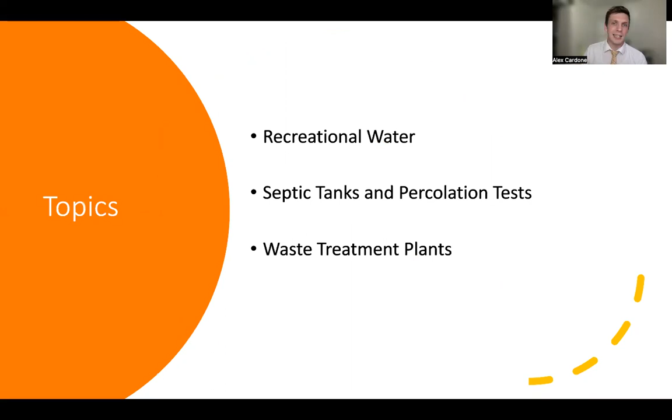So the topics that we're going to be covering very briefly: recreational water, septic tanks, and percolation tests, and wastewater treatment plants. So very quickly, we're not going to go over too much having to do with the recreational water, but one thing I really want to illustrate is that very similar to the water that we drink, just like we covered last week, recreational water should contain a very limited amount of bacteria. By that, I mean, as feasible, none, if possible.

For example, even pools that utilize chlorine, bacteria can build up, and that's a concern. Even though we're not actively drinking it or bathing in it, making sure that our recreational water is as clean as possible is also vitally important, because it's not just through ingestion that we could be subject to waterborne illness, waterborne disease, and kind of that stagnation. So just keep that in mind. It's important that we're trying to keep the overall quality of our water high, not just our drinking water.

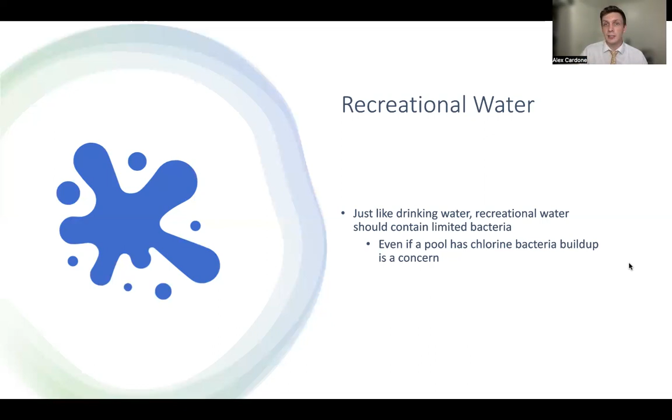But let's go ahead and get started on some of the really new material, which is percolation tests, or perc tests. Ultimately, the purpose of a perc test is to examine how rapidly water is absorbed into the soil, specifically because that water is going to ultimately run off into the regular ground and through a septic system. Typically, this is very important if you're looking to build your own house, especially if you're not going to be connecting to regular city or county water supplies or sewage supplies. A percolation test is very important to better understand what kind of soil and what kind of environment is around your house.

So, as you may come to realize, there are certain substances that are both good and bad for certain areas, specifically drainage fields where water will kind of leach into, but we'll get into that a little bit later. So water permeable substances increase the absorption rate, while less permeable substances such as clay, which is one of the most common ones that we find, decrease how well water can absorb into the rest of the soil. So understanding that can help you to know whether or not you're going to pass or fail a perc test. And it is important to understand that a perc test is very important.

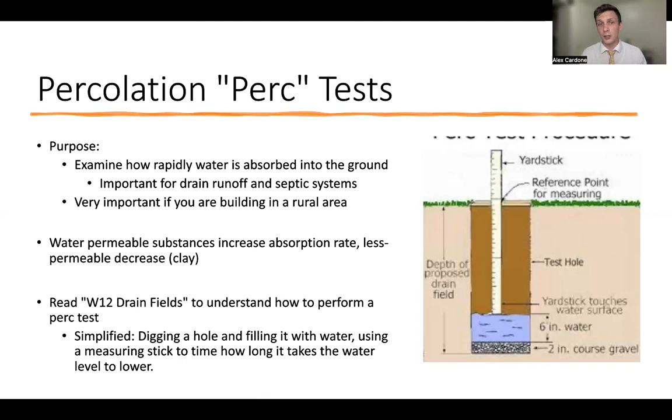So next, septic versus sewer systems. So no matter where you live, well, at least here in the United States, I'm not very familiar with how it necessarily works outside of the United States. But our wastewater, it goes somewhere. So septic and sewer systems really differentiate who owns the sewer or the wastewater treatment and where in location these things are. Typically in more rural areas, we have septic tanks, whereas in more city environments, we have sewer systems. Septic tanks, ultimately it's the owner.

It's a septic tank, that picture up there in the top right with the two green circles. That's a septic tank. And it's basically a miniature wastewater treatment center that's right in there. As well, the drainage field helps to filter out any particulates or contaminants. We'll go over how it works here in a second.

Whereas in that bottom right, you can see these houses, they're connected to pipes, which connect closer to the street into a bigger pipe, and then it's shuttled off somewhere. So sewer is transported to a central location to be treated instead of on site at the house. And typically they're treated by the city or the county. So typically you're billed by the city or the county.

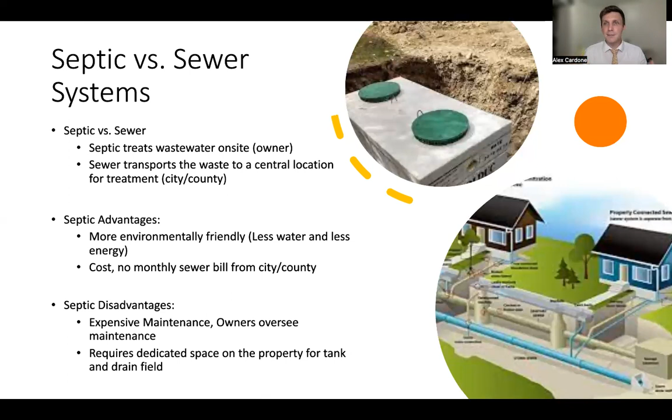But let's go over what a septic tank is. So here it's just a picture. I'll try to describe it the very best that I can. Basically, it's a big concrete box split up into two sections. There's the settling tank and then a filter section. These two compartments typically have holes at the very top so that anyone can access both of these containers. These green circles right here are just lids.

And so water flows in the inlet portion, very aptly named. That's water coming from the house. Water from the house goes in through the inlet and it immediately hits this T right here in the pipe. And that's very important. What this is causing is the water to hit it and stop. That's causing all the water to go straight down, so that any solid waste is going right down here to the bottom in sludge.

The reason for that is you'll notice these two dividers, they're not divided completely. There's a little gap in between them, known as a baffle. This is to help limit the amount of solid particulate that makes it through to the secondary area. Again, the whole purpose of this is so that the water can get through, but some of this sludge at the bottom, the heavier particulates, or scum up here at the top resting on the water, the lighter particulates, don't make it through to the other side.

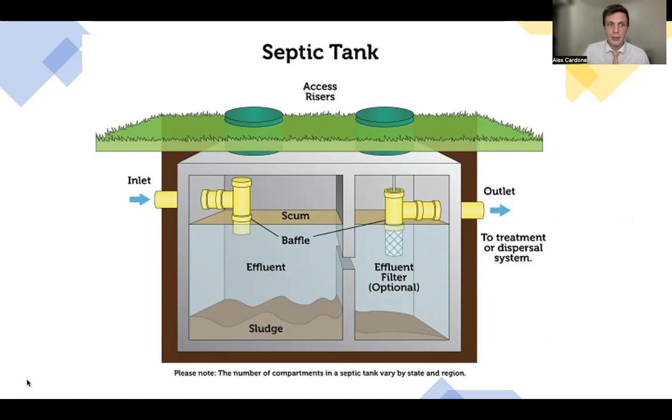Inside of this sludge, however, is an ecosystem very similar to our gut, our stomach lining and our digestive tract. There's a whole biome of bacteria that's good. And we really appreciate them because they have a very good job of eating that sludge. It takes time, but it's anaerobic bacteria that digest those solid particles. So aerobic, you can think of oxygen, like aerobic exercise, you're having to breathe a lot. Anaerobic means no oxygen. So this is bacteria that thrives in an environment that does not have a lot of oxygen. And so the container being sealed is very, very important because it helps that anaerobic bacteria flourish.

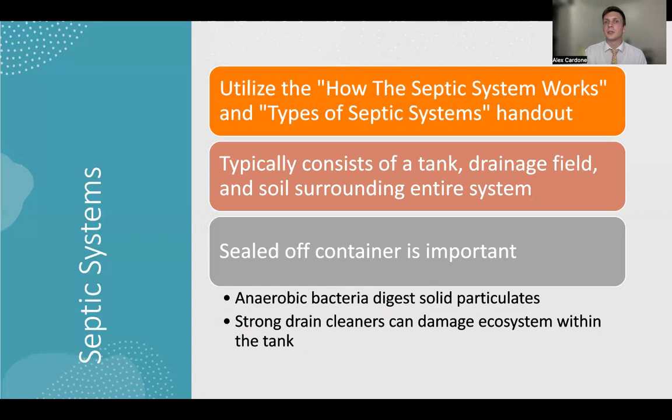It's also important to understand that they're very delicate. That's why strong drain cleaners and things of that nature are sometimes not the best. We still need to clean our houses and make sure that our systems on our end are taken care of. But too much or too harsh of chemicals can actually damage that ecosystem within that tank and lead to further buildup of that sludge. But that's a little bit about septic systems. Again, it consists of three parts: the tank, which we just went over, the drainage field, which we're going to go over right next, and the soil that's around it. And we'll describe that here in a little bit.

So, septic system drainage fields. Ultimately, it's the liquid waste, the water that went through the tank and is now being distributed out into the soil around your environment and around your house. There are a lot of different ones in the handouts that I referenced before. Really focus on three types. There are gravity systems, which utilize a septic tank and require a distribution box so that the water can flow evenly. However, it requires gravity so that the water can go down. There's no pump house using extra energy to move this water anywhere. So if your property has a natural decline, a gravity system may work out just great.

Then there's also a sand-lined trench. This uses a septic tank and a pump tank so that it can use some energy and push this water through a sand-filled tank before it gets to the drainage field. I have some pictures on the next slide to help out with this as well. The sand acts as a filter, and that'll make a lot more sense; we're going to be referencing back to how sand filters wastewater quite a bit throughout this week. The sand acts as a way of treating the waste before it even gets to the drainage fields. And then there's a mound.

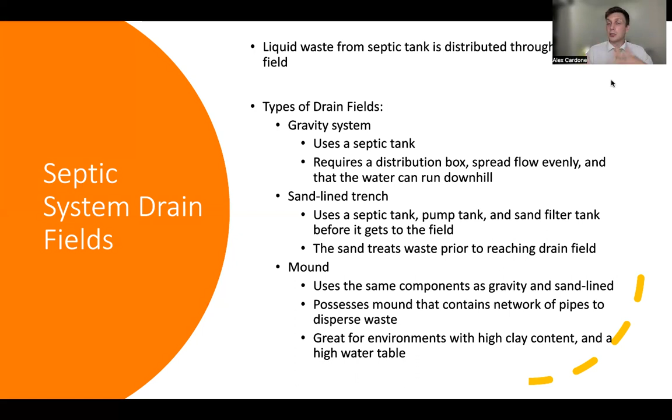And this is great for environments that have a very high clay content, because again, clay, it's not very permeable for water. However, if you have just very slow drips, it can work with that. It's just going to slow down the rate at which water goes through. And as well, if you have a very high water table, because again, we don't want water flowing too fast, because if it flows too fast, then it might not filter all the way before it gets to the regular water supply. And now let's look at some pictures to better understand this.

So up here in the top left, we have a gravity system. So we have a little house and it's working. The pipe goes straight down, and it's kind of hard to tell, but you can see from the landscape, it's kind of downhill from it. Just imagine it's going downhill a little bit steeper, I guess. But it goes from the house into a septic tank. That concrete box moves forward to another box. This is a distribution box.

So this is what splits the water into 3 or multiple different ways into these various different tubes that stretch the entirety of an underground field. And in these tubes are small little holes that are drilled in with purpose. So as the water goes through the distribution, it filters out evenly throughout the different tubes, and then the water can drip through those holes evenly at an appropriate pace so that we can time it correctly. Because at the very bottom, you can see that's groundwater. We, again, don't want water to go too fast, and we don't want it to go too slow. It's a very delicate art.

Up here at the top, this is an example of a sand-lined filter. So again, we have our house. It flows from the house into a septic tank, just like gravity, and then it goes into a pump tank. This just uses energy to push the water through something. It's going to need a little more oomph than just gravity itself. And that's because it's going through a sand filter.

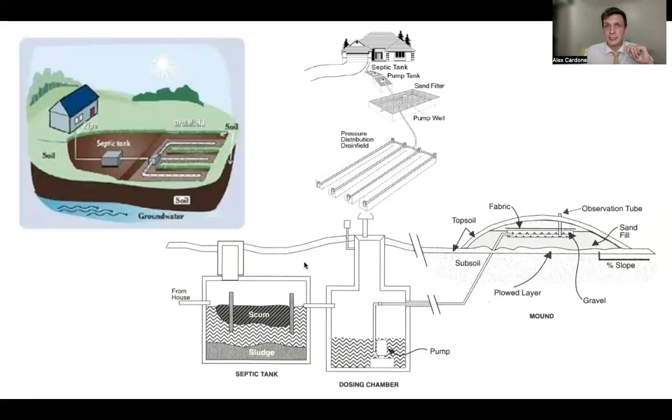So now let's go into the city sewer waste treatment centers. I guarantee you've seen these. You possibly just didn't know what you were looking at, or you knew and you're really smart. But be sure to watch. There's two videos. They're both 25 minutes long. I apologize about that. But after you look at this, after you look at your own reading, it can provide a little bit more examples of what these things are.

The biggest things I'm going to try to highlight and try to help you avoid getting dragged down into too much terminology. Some important things to remember, though, when it comes to wastewater: the average person is estimated to produce roughly 125 gallons of wastewater per day. If you remember that exercise where you tracked your own wastewater output, how much water you drank and used, you may have been close. You may have gone way above. You may have been really below. That's the wonderful thing about averages. But on average, 125 gallons of wastewater per day.

You think of some of these cities with millions of people in it. These waste treatment systems are going to have to deal with a lot. And that's why they're here, and that's why typically you have to pay a monthly fee to upkeep this. It's very important. All city wastewater is sent to a central waste treatment center, such as the one illustrated above. And these, it's important to understand, are an alternative to a septic tank.

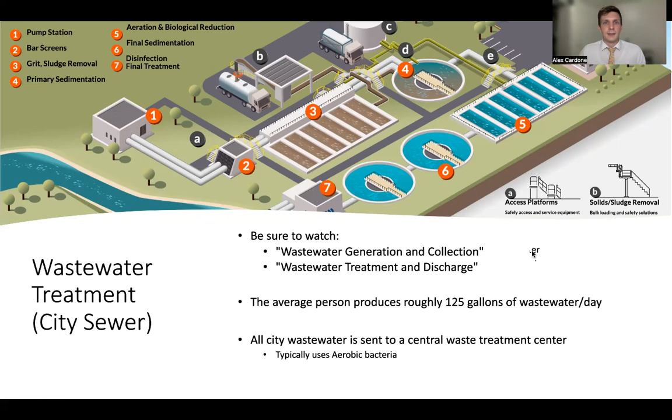All right, I think it's thinking.

Okay, good. So it's important to understand that there are three different treatment types it goes through: primary, secondary, and tertiary. Not every waste treatment plant has all of these things, but you need some of each one. The primary reason is because each one, as it goes from primary to secondary to tertiary, is slowly filtering out more and more particulates. That way it can be a cleaner result at the end and go back into the regular water stream, and it'll be okay for future consumption and use.

The typical flow is that it's filtering the largest objects first and the smallest objects last. With the largest objects, it's filtering out literal poop. And at the smallest, it's sometimes trying to get rid of bacteria. We'll try to describe it a little bit with these pictures, and I have more pictures afterwards. The most important thing is understanding where each of these things fit. Is it primary, secondary, or tertiary? It's important to distinguish all three, because they help you understand what tool you're utilizing to clean the water in the system.

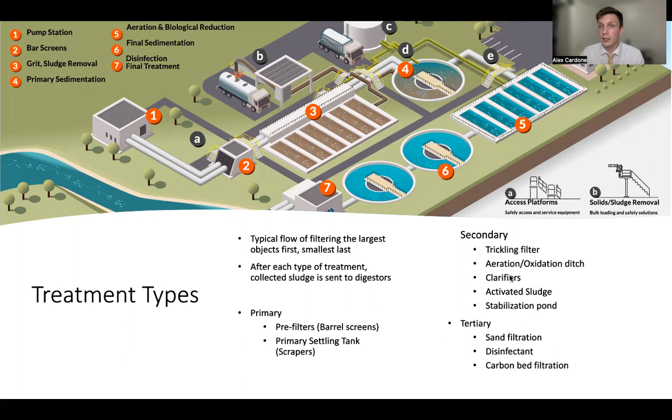And then we get into right over here, 4 and 5, and as well 6. And so 4, 5, and 6 include different items such as a trickling filter, aeration oxidation ditch, clarifiers, activated sludge, or a stabilization pond. So let's go and look at all of those, to better understand what they are.

So secondary treatment. It's important to understand that a waste treatment center typically has very large basins of water, very, very high tanks, very, very big. And they use aerobic bacteria, or this constant churning, getting air into the water to help promote that bacteria to eat and digest all this solid waste and any other particulates that might be in the water.

So right here, we can see a trickling filter. That's right here in the bottom right. Basically, it looks like that big basin. However, there's arms up the top and they're rotating, and it's spitting out water. It's trickling water as it spins around. This has one really big function: because it's churning up the water a little bit, it is making the water very oxygen rich, so that, again, the bacteria can have the oxygen it needs to keep munching.

Then we have an aeration or oxidation ditch. And again, a waste treatment plant doesn't need all of these, but typically has a few of these to accomplish its function. Up here in the top left, we can see an aeration or oxidation ditch. Basically, it's using an air compressor or a pump to physically push air into the tank so that bubbles can go around, it can excite that bacteria, and water can naturally filter through into a settling tank before it's moved on into another process.

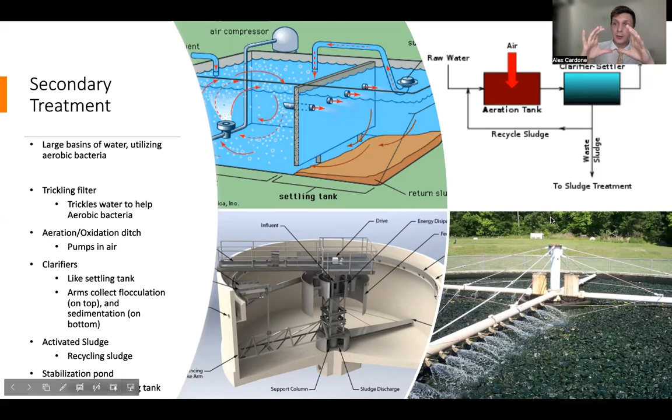Then sometimes there's a stabilization pond. Stabilization pond, you can think of it like the primary settling tank, but you do it again. And so it's that natural settling that we're trying to accomplish to further filter out any large particulates that may be present. So by this time, we've already taken out the biggest particles. We've taken out some of the medium and also the small particles. Now we've got to get to the very, very small particles. And so that's where tertiary treatment comes into play.

So you can either use gravity to filter through a substance and perform sand filtration or carbon bed filtration, or you can use disinfection, and it's ozone or UV lamps. And typically, sometimes you don't just have one, you have multiple of these. You might have sand filtration and ozone, or sand filtration, ozone, and UV. It just depends on what ultimately is able to get you that quality water at the end.

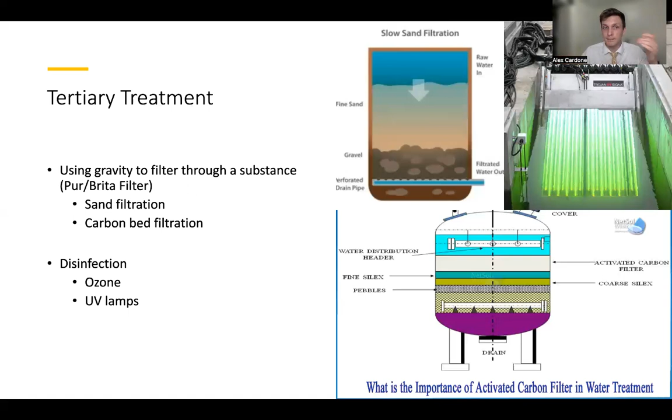But one of the big things is, again, you don't have to know how each one works or what each one looks like. I couldn't care less about that. But it is important to understand which of these is primary, secondary, and tertiary, because that helps illustrate which one it's trying to filter. Is it the large particulates? Is it the very small particulates? Which one are we looking at?